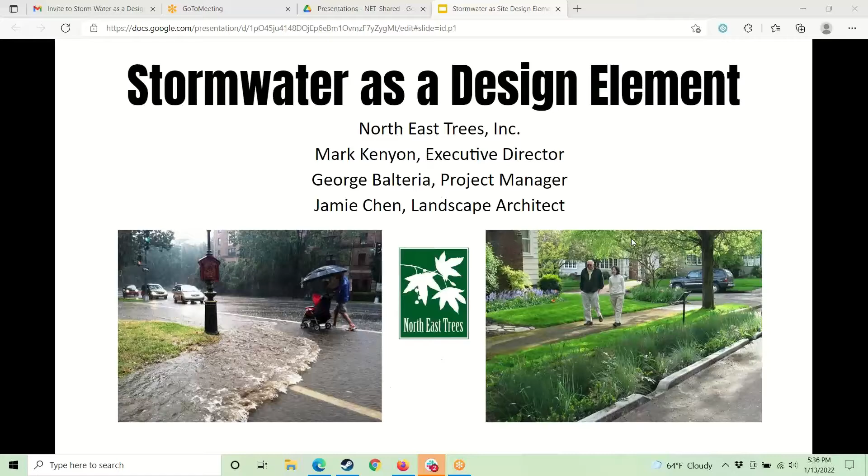And I'm going to talk just briefly about North East Trees, and then I'll sort of talk about stormwater at maybe the more strategic level, and then I'll turn it over to Jamie, and she'll start talking about more of some of the design elements and low impact development examples. And the idea is to try to leave plenty of time for questions. I think that's a more interesting way, and you probably can go to our website and learn a lot about Northeast Trees. So, Jamie, give me the next slide.

There we go. So these are the sort of objectives that we want to try to achieve tonight. As I'll describe in a minute, people come to stormwater from a number of different perspectives, and so sometimes projects are all the perspectives that I'll get into in a minute, and sometimes they're just one or two of them. But it is becoming a much more both necessary and desirable part of projects, anywhere from planting a tree all the way up to designing a large building. And low impact development, or LID, approaches are becoming issues that more and more of us are having to deal with. Next slide, please.

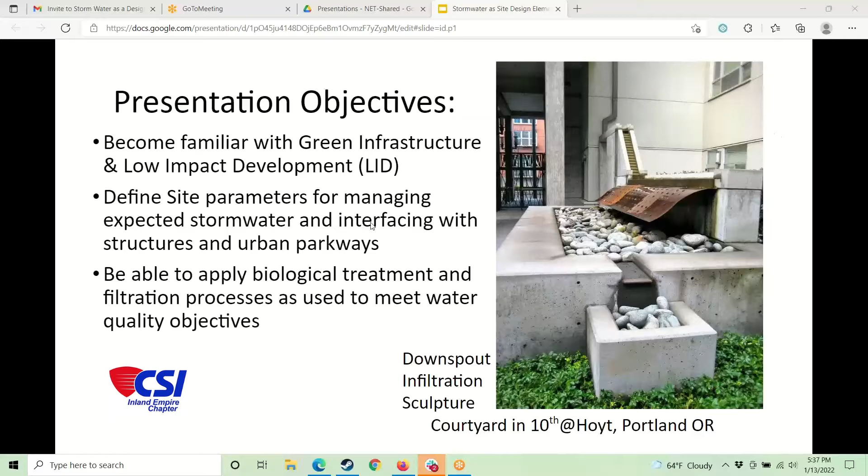So this is a little bit about North East Trees. We've been around for a little over 30 years. Almost all of our projects today are stormwater related in one way or another, and we've been doing stormwater projects at schools and parks and various other types of facilities for almost 25 years now, maybe not quite 30. And those are our primary areas that we work. We're designing and building parks; we're a design build firm.

We hire and train local youth, often at risk for gang activity, and we try to provide both technology transfer to them as well as skills and a job. Oftentimes this is the local youth's first job, and our intention is to try to get them interested in landscape architecture, landscape design, construction, and help provide them future jobs in those areas. If you want to know more about us, go to our website, which is northeasttrees.org. Next slide, please.

So we're known for many different types of projects. Some of the ones that we are most known for are the projects we've done along the Los Angeles River. We were really the first organization to do any significant projects along the river. Just in the center section that I'm showing here, we've planted almost 6,000 native trees along the river, which helped create the desire for parks. We've designed and built about 25 parks along the LA River, from up at its headwaters down into the Gateway Cities area.

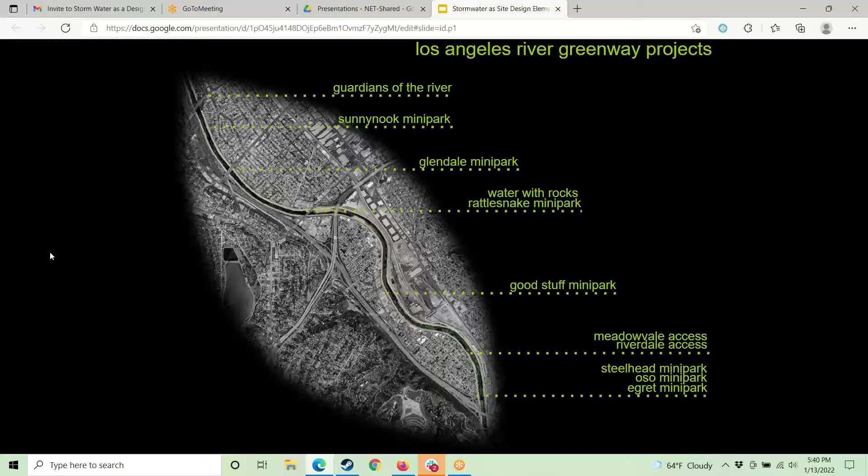So in any case, we started much of our work back in the 90s along the Los Angeles River. These are some of the parks that were built starting at that period. Now there's a multi-mile, tens of miles bikeway through this section that comes underneath the canopy of the trees that we planted along the parks that we built. So next slide. To give you an idea, here's a park coming up, Jamie. This next slide's a property that we did down in the city of Cudahy, a little further south of the city of Los Angeles.

And often our project sites start off looking something like this. They're sort of degraded property, often owned by the public for one reason or another. We seek state funding or local funding to then convert them, next slide please, into some sort of park.

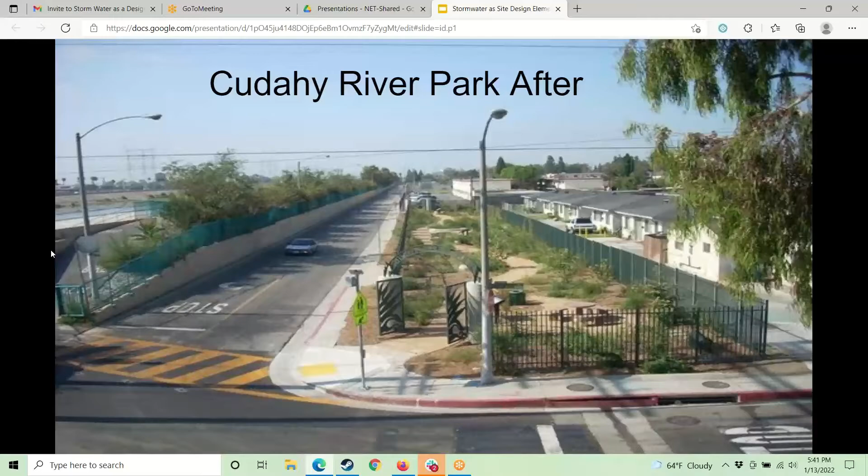In this case, this is a linear park, and so the stormwater comes in at the top end of this park and then works its way through a series of low impact development treatments that Jamie will talk about, some of them not specific to this park, but bioswales and rain gardens and other ways to capture, infiltrate, and filter the stormwater. And then any overflows are released, in this case, back into the Los Angeles River. Next slide, please.

So there are various driving forces that we see as an organization, and I'm sure that most of you see. First off, the ones that are basically related to, at least here in California where we live, but also worldwide, climate change and the increasing droughts, population increase and further development, which are putting stress on our local water supplies and our flood control capacity.

And so you'll see then, because of that and just water quality, the County of Los Angeles has been violating the Federal Clean Water Act. I haven't seen recently, but in the past it had been violated for almost 20 years.

And so many of these regulatory, at least for the clean water, the first 3 or 4 that I show on that second bullet, are all related to making and providing clean water that we put out into the ocean. But as I'll show in a minute, in order to meet our local water supply and future needs for water, we're also focusing on flood control protection and water supply issues. So Jamie, next slide.

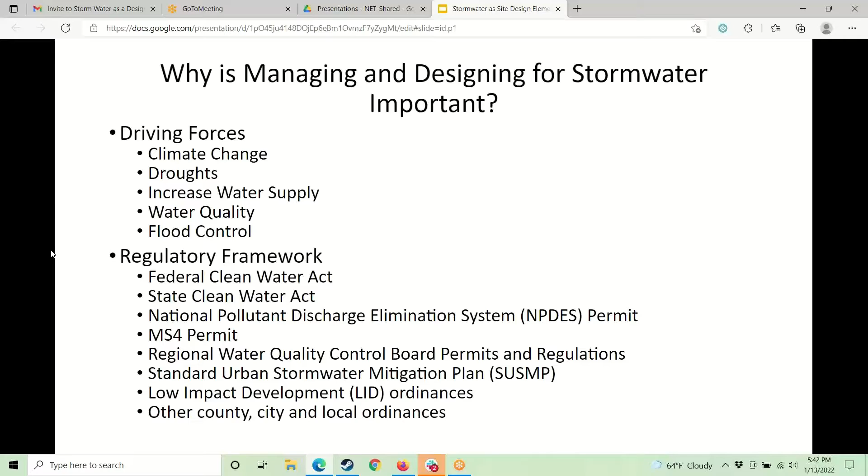So here in LA, and again, this is typical for other areas around the nation, the City of Los Angeles has what it calls its One Water LA plan. LA County has approximately 80 cities, and each of the cities and the county within the County of Los Angeles have adopted various plans that are similar to this one from the City of Los Angeles. So next slide, please, Jamie.

And the idea of this plan is to think more holistically about water and to try to make the region become water self-sufficient. So today we import most of our potable water from either the Colorado River, the Owens River, or from the state, the California Aqueduct Project. But we have a lot of water that falls here in the basin, and so the idea is to think about our water on a watershed basis.

So you'll often hear people talking about this idea of being holistic with respect to the watershed, and that involves thinking about the flood control risk, the water quality, and water supply all as one. So capture as much of the rainfall as we can, put it into our groundwater resources, pump it out for drinking water, send it to our waste treatment plants, and then recycle that water back for other uses. And so you'll see, for example, purple pipe coming throughout the county now. We use it on a number of our projects, and you'll be seeing more and more of that as time goes on. Next slide, Jamie, please.

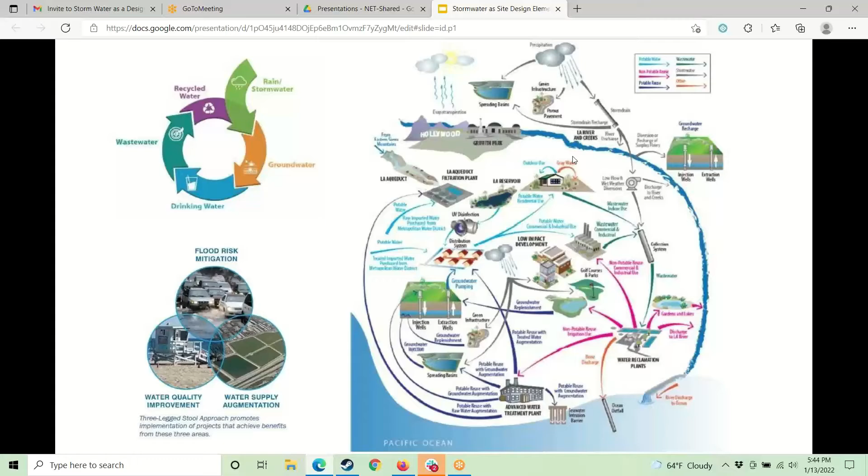The County of Los Angeles has about 10 of these, and the idea is to provide incentives to developers of all forms, so park developers like Northeast Trees, but people who build buildings and roads and other types of infrastructure, to get their projects to be sensitive to stormwater, to water quality, and to flood control. And so the idea of an enhanced watershed management plan is to encourage people to use low impact development strategies. So next slide, please. And again, Jamie will talk in a minute about what we mean by LID.

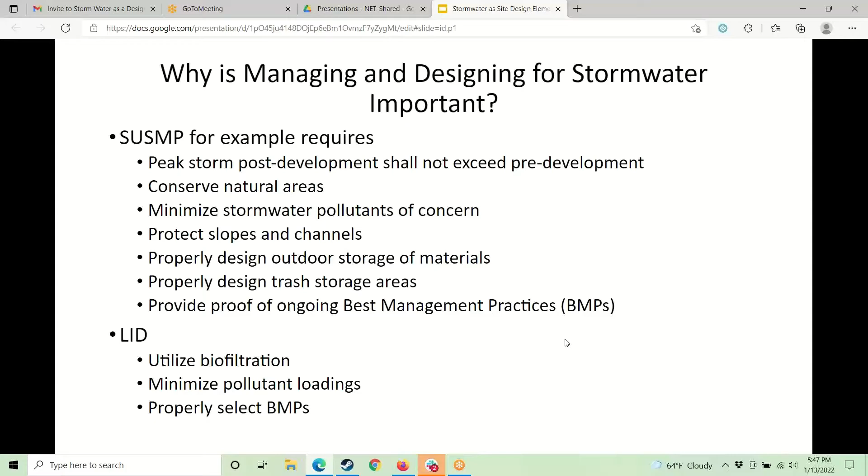So you'll see there's a number of requirements that come from just that one. And then, at least in the county and the city, in these enhanced watershed management areas, there are now requirements when you go through the planning process. You'll need to get a buy-off from the Bureau of Sanitation on their LID ordinance, for example, in the city of Los Angeles. Okay, Jamie, next slide.

I just wanted to leave a few resources. Again, in your county or your city, there are likely to be resources that would be the first place to look. The ones that we use a lot here are the ones listed, not just from California, but from around the nation. I don't know if I show Tucson here, but there's some really good work happening down in Tucson.

And then for Northeast Trees in particular, the LA County Hydrology Manual and the LA County and City Low Impact Development ordinances and guidelines are really, even if you're not in the county or city of Los Angeles, very good resources for understanding this idea of LID, or low impact development.

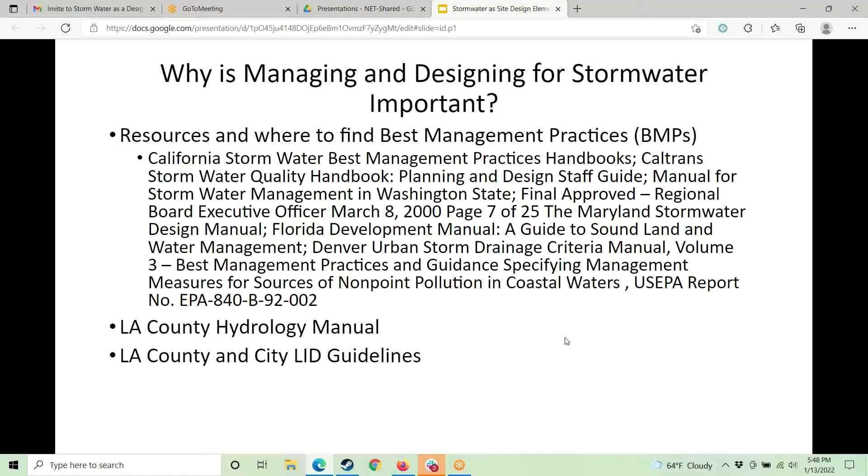Next slide please. So I'm just showing one example of something that I use. As Dave said, I'm a recovering engineer, and so I still like to do engineering things.

The LA County Hydrology Manual has this flow and volume calculator that you can use, and we often use it at Northeast Trees to just get us, when we're in the pre-design or early in a project, to estimate how large the volume is for our particular project site, and whether or not we're volume constrained or flow velocity constrained. So the LA County Hydrology Manual and the tools it provides helps at least us do that.

And they're not hard to use, so you don't actually need an engineering degree, but one ought to read those. Many projects, including many of ours, will have an engineer associated with them where your engineer would just do these calculations. And for many projects that do have engineers, like a building or a road or something along these lines, then almost certainly the engineering will drive the stormwater part of that type of project.

For us, we're often building parks or other types of green infrastructure, and in those cases, sometimes we really are not being driven by the regulatory needs. So we're not necessarily going to build a highly engineered bioswale, for example. But that's just for us. We do find the hydrology manual a useful tool.

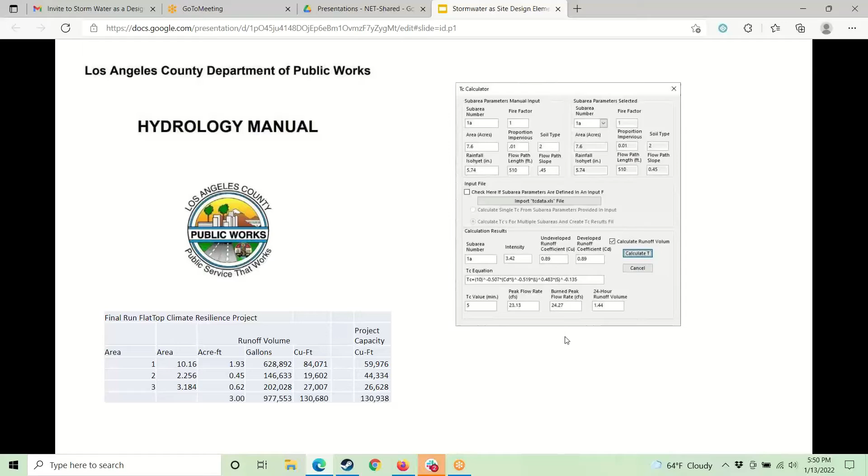Okay, so from a design point of view, moving beyond a conventional approach to stormwater management, which is sheet flowing directly into a drain, which then goes from small to big all the way out into the ocean.

It's about, from a design point of view, multiple functions when you choose to use LIDs or low impact developments. Especially the kind that Northeast Trees has done in the past, which from our point of view is beneficial because we are improving aesthetics, enhancing recreational opportunities, providing wildlife habitat by way of planting more plants and trees, and improving safety, in that it is known that in a natural environment, people slow down, especially pedestrians, such that they're not likely to trip over a giant grate.

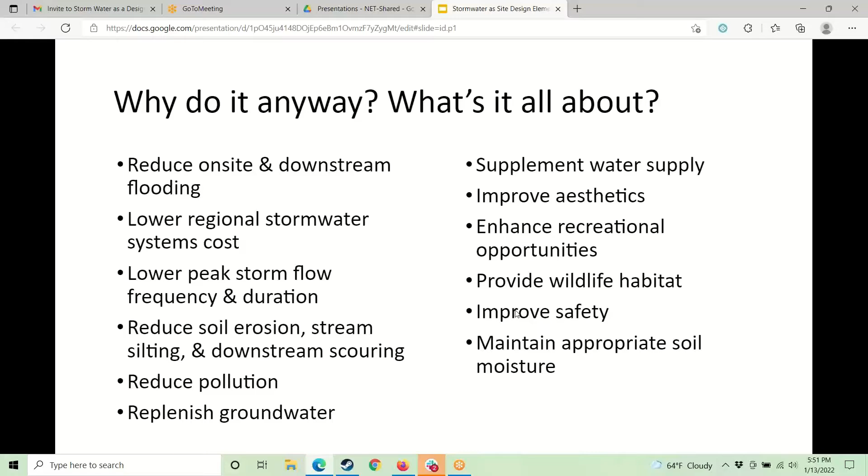So, practices to reduce runoff.

What we have to think about holistically, if you think for an entire site like a campus, a medical facility, a hotel location, is reducing impervious surfaces overall such that water has opportunity to soak down. So within your code, if there is a minimum parking area requirement, you can do that within the building footprint. For example, you try not to have an exposed parking lot.

Within the building footprint, you can put a green roof on top of the building if you plan ahead. You can have downspouts redirected into bioswales and cisterns instead of having downspouts going directly into an underground collection system and then shunted away. You want to reduce compaction overall across the site.

You want to leave undisturbed areas undisturbed, and then you try to build on top of previously disturbed areas if possible. And for Northeast Trees, always plant more trees, because trees are a non-engineered but highly effective natural solution for managing stormwater.

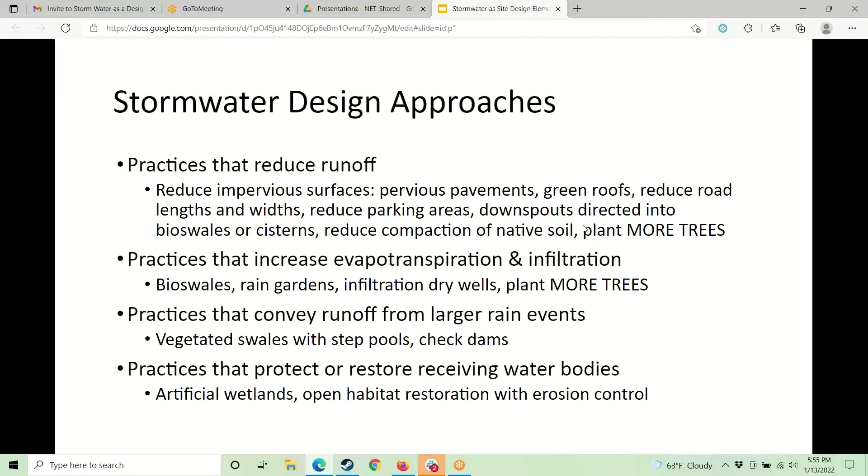We have also been advised by Barbara L. Hall, who is an engineer. So in a project, it is important to consider the feasibility of LIDs when you are selecting them.

So if you want to do a green roof, this has to happen on the front end of the design, where you have to consider budgeting, you have to consider engineering for the additional roof load, and you have to consider irrigation, because water must be pumped upwards, so that will be a cost that you must consider. There are also space constraints on project sites that you have to consider.

If after putting in all of the buildings, all of the parking, all of the circulation, and you've trimmed back as much as possible, you end up not being able to have the square footage needed for a wide horizontal type of LID, maybe you have to end up doing a vertical insertion instead. And all of that comes down to cost.

And when it comes to LIDs, the most important thing you must do is get a geotechnical report from a reputable geotechnical firm. Geotechnical will give you information on the soil profile of the site, such that they can make recommendations for engineers to consider on how quickly water can infiltrate into the site.

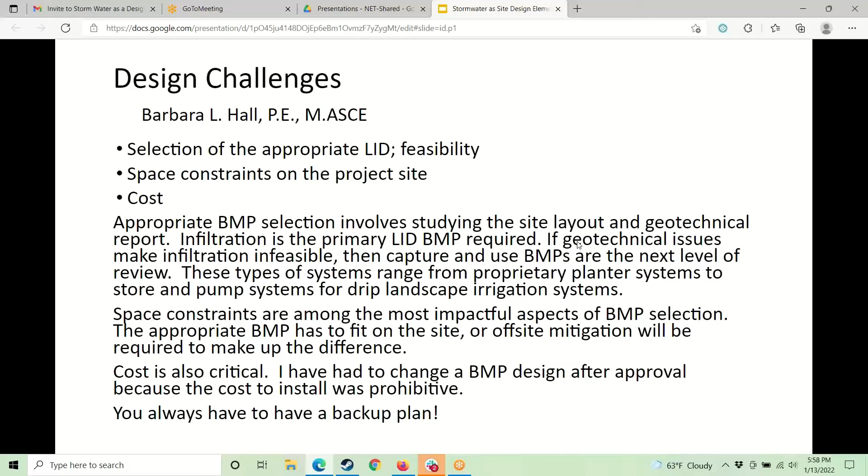So overall, you have to have flexibility and familiarity with various different types of LIDs, and a handle on costs for engineering and potential geotechnical reports that don't give you the result that you hope for.

So starting from the rooftops down, this is a highly engineered solution. These are green roofs. They are best for stormwater filtering and heat island mitigation within a highly urban context.

You must design them early, and you have to consider the structural engineering. For plant growth, the media has to be 6 inches to 1 foot in depth, and the weight of this growing media is heavy. Deeper growing media increases the plant species choices available to you, which would increase the value and attractiveness of such a project to the client.

It will require some irrigation to start the plants growing during the establishment phase, so you must take that into account as a cost. And wind shear must be accounted for.

Planting trees or large shrubs close to the edge is definitely not recommended. And the waterproof membrane of the roof underneath the growing media is very, very important. Research must be done for locally appropriate choices.

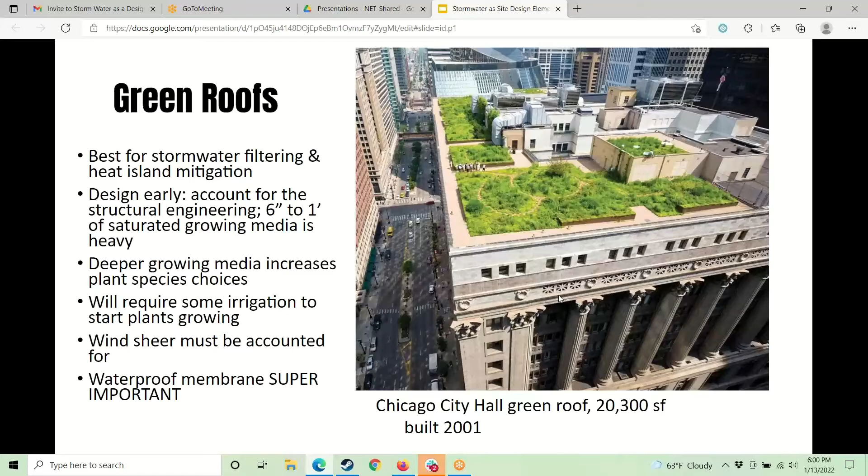But overall, if it is possible, a green roof is definitely one of those capstone projects for an architect. And plant choices can be done by consulting landscape architects or professional horticulturists with experience.

Pavement types, thickness, and the base course profiles are dependent on anticipated traffic load and desired water storage capacity of the base course. The gravel underneath the pavers functions almost as a sponge, allowing water that gets in to soak downwards. This is not an application for slopes, and it does require maintenance.

It does require sweeping and vacuuming, so the client must be made aware of this, and a maintenance manual must be given to them. We have experience with that.

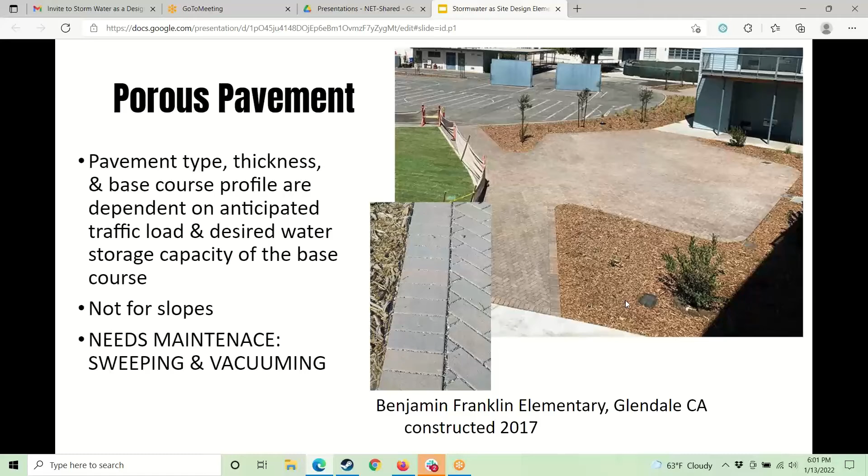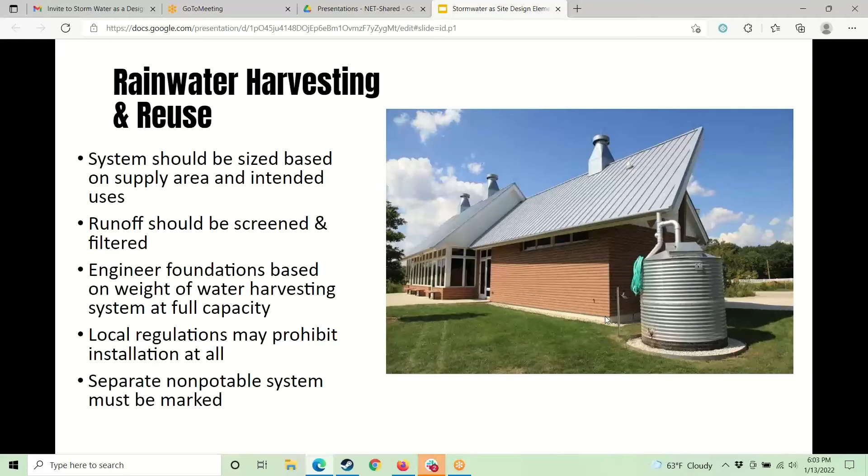Engineer the foundations of the cisterns based on the weight of the water harvesting system at full capacity. This is also very important if you happen to be at a site where there can be subsidence. And some local regulations may prohibit installation of such systems because you're not supposed to harvest and keep your rainwater, so be aware of that for permitting.

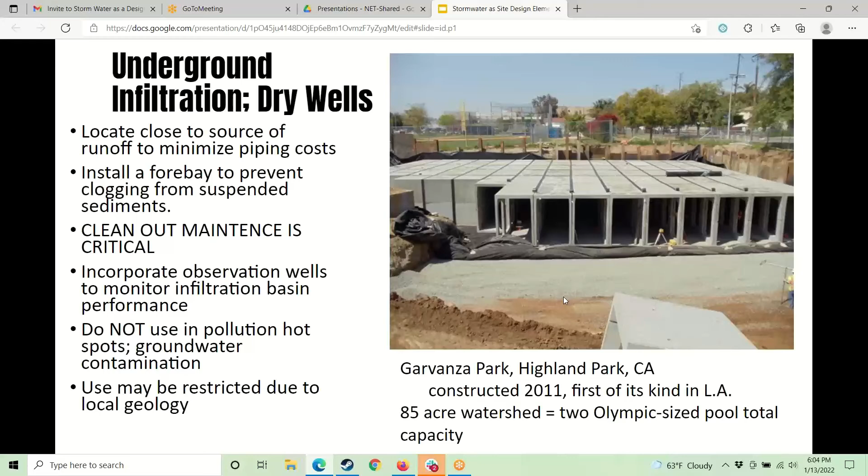This use may be restricted once again due to the local geology. If the geotechnical report comes back and you cannot infiltrate there, then it becomes a liability that you have to take into account. So, rain gardens and bioswales.

Rain gardens infiltrate water. Bioswales filter water as well, using plants and substrates. Most of the time they are fairly interchangeable, but bioswales have a little bit more design going into them.

The most suitable sites have soils with higher percolation rates already, because you do not want to risk mosquitoes or other insect disease vectors due to standing water. So you have to do perc tests for potential locations. What happens is it's a planter area with a dish shape, with a dip in the middle.

It does have a drain inlet that is placed higher just in case there is a heavier rain event, so that the water does not flow out of it. As it soaks into the dirt, it's a combination of topsoil, gravel, and other filter media. There are plants planted specifically that can withstand being submerged underwater for a foot or so for 48 hours or so, and trees, such that the plants can uptake the water and at the same time filter out foreign material. Then the water is slowly cleaned as it goes into the groundwater.

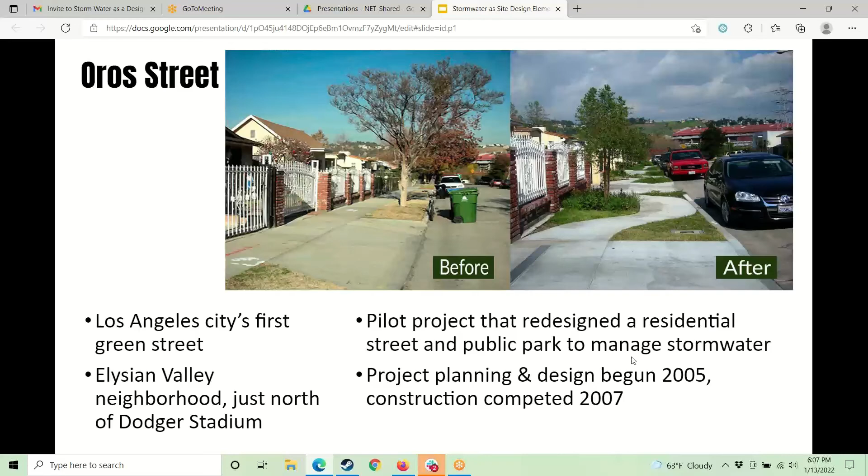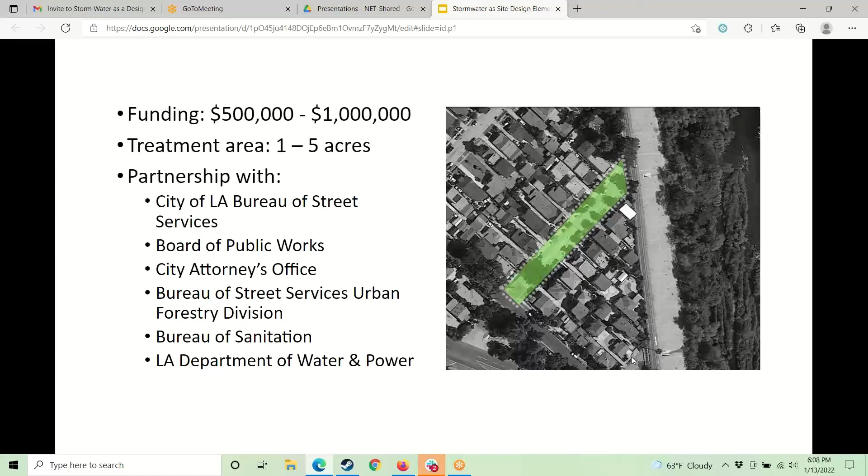This is a multi-department partnership with Northeast Trees collaborating and coordinating between all these different departments. As you can see, on a municipal level, this is quite a partnership, with City of LA Bureau of Street Services, Public Works, the City Attorney's Office, Urban Forestry Division, Bureau of Sanitation, because the water is entering conventional storm drains, and the LADWP.

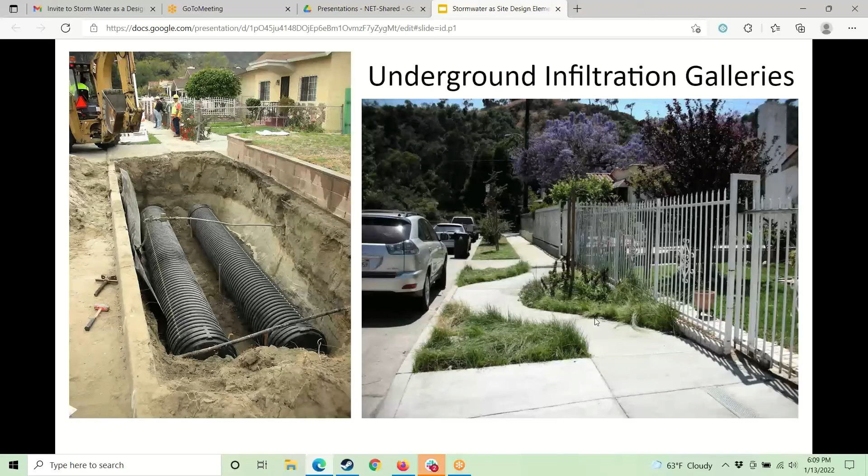So here is a write-up in cubic feet, but basically the total runoff produced by 3/4 inch worth of rain falling all at once, draining into Oros Street, is 53,000 gallons. 65% of runoff was treated within the infiltration trench running underneath the sidewalks. So that's what is underneath the sidewalk: there are 2 very large perforated pipes, surrounded by gravel, and then the water starts soaking.

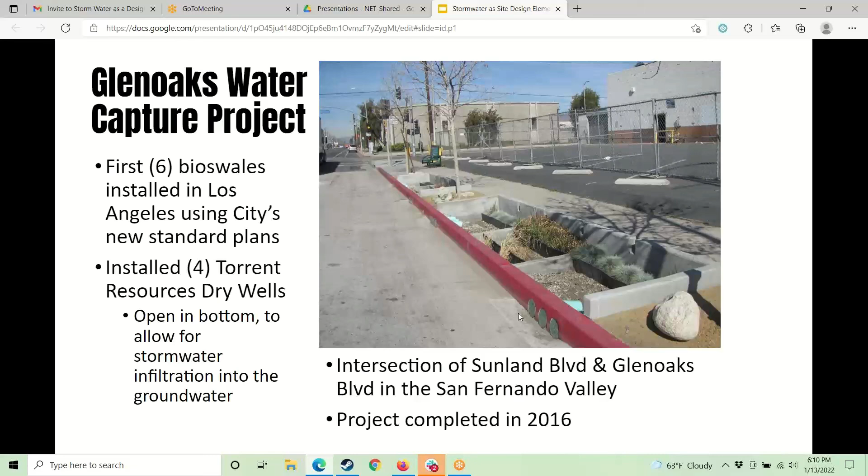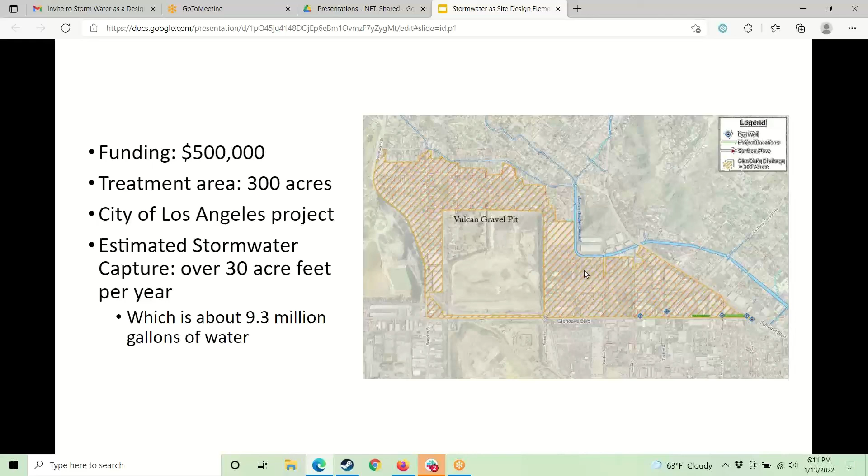For this one, the funding is $500,000. The treatment area is much larger at 300 acres, and the estimated stormwater capture is 30 acre-feet per year, which is about 9.3 million gallons of water that is being captured, filtered, processed, and infiltrated underground instead of immediately being shunted over to the channel.

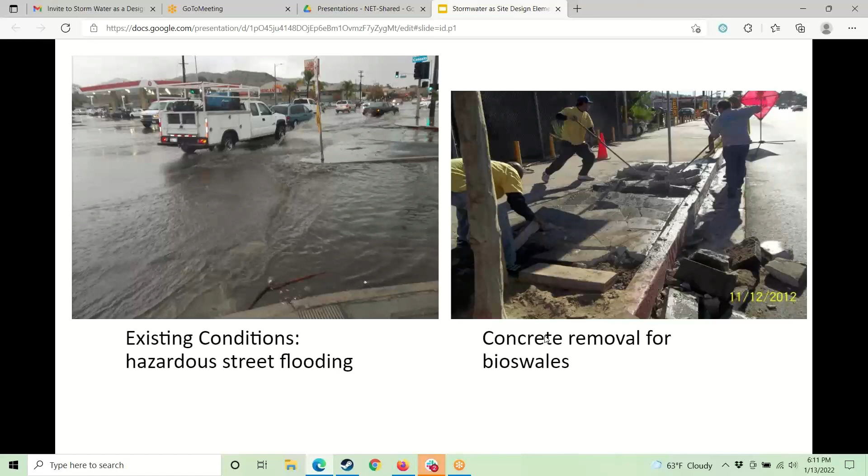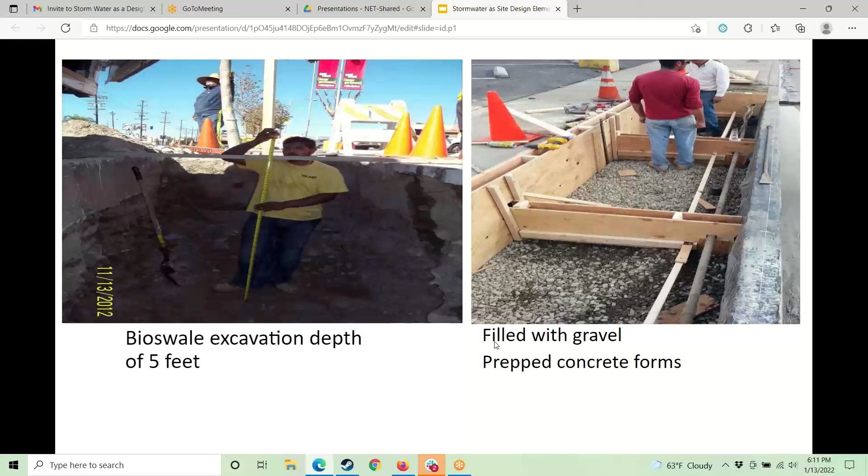The existing conditions prior to the project were hazardous street flooding during rain events. The following photos show project progress: bioswale locations were chosen, concrete was removed, bioswale excavation depth was 5 feet, and then infilled complete with gravel. The curbs have inlets which catch the water, the water flows in and is slowly soaked in. The bioswales also have plants planted that will intake the water, and street trees as part of the bioswales.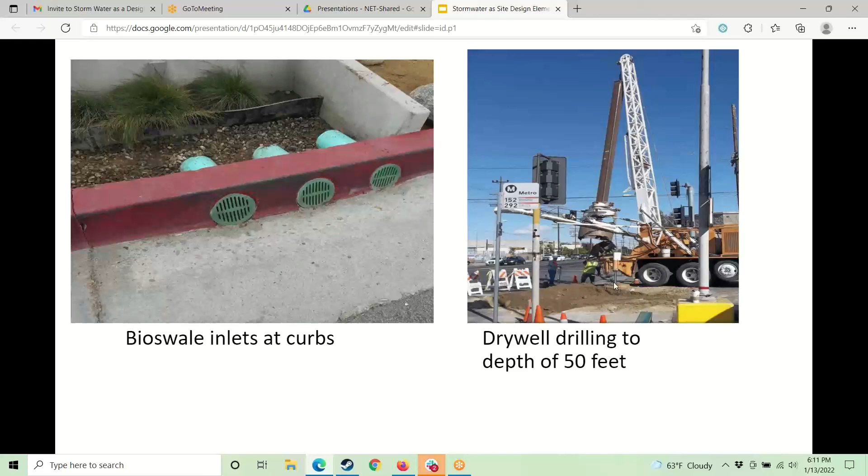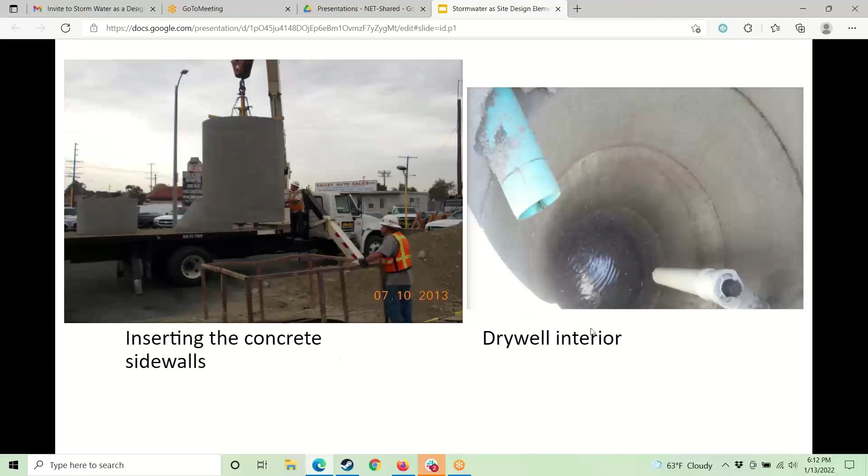So this is the Torrent dry well. Dry well drilling goes to a depth of 50 feet to get to appropriate groundwater infiltration, and then the concrete sidewalls are inserted. The dry well interior is usually empty prior to storm events, and then the dry wells capture the storm water. It looks exactly like a conventional storm drain inlet, more or less. And then the bioswales are capturing storm water in this rain event, as you can see here.

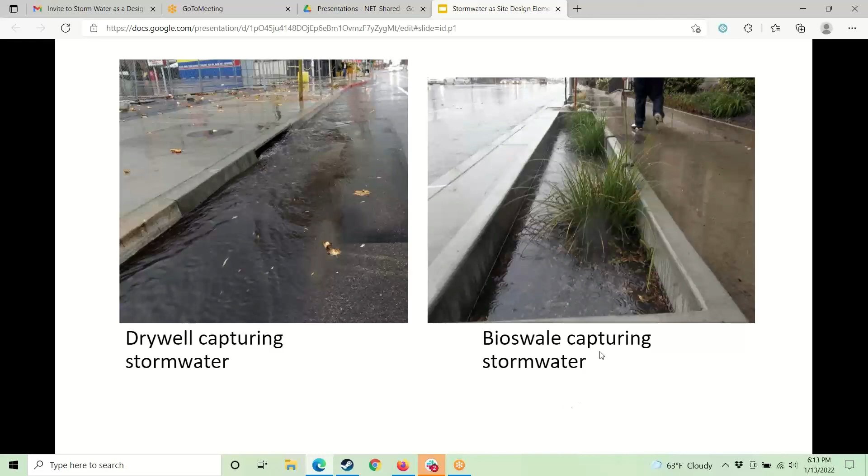One thing you have to know in a highly urban context, but really in any context where there are people involved, is that maintenance must be done. Trash must be picked out because people will litter, and the growing substrate might need to be replaced as the plants use up the soil nutrients. So compost, that sort of thing, might need to be added over time, and it should just not be allowed to clog up.